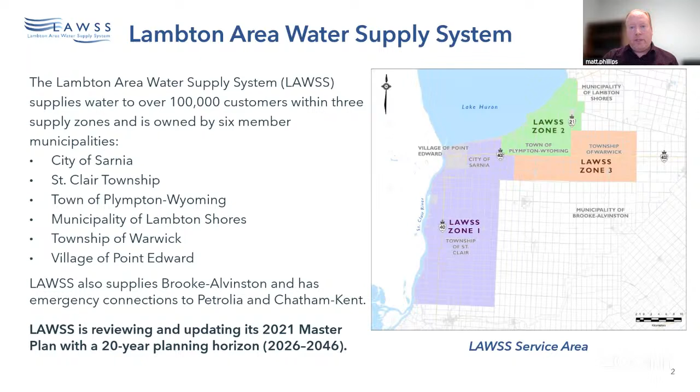LAWSS is reviewing and updating its 2021 master plan with an updated 20-year planning horizon, 2026 to 2046. Population growth has accelerated since the last master plan and is expected to continue, which means higher water demand. In addition to population growth within the existing service areas, there is the possibility of a new municipal customer connecting to the system. These trends drive the need for system upgrades and strategic planning.

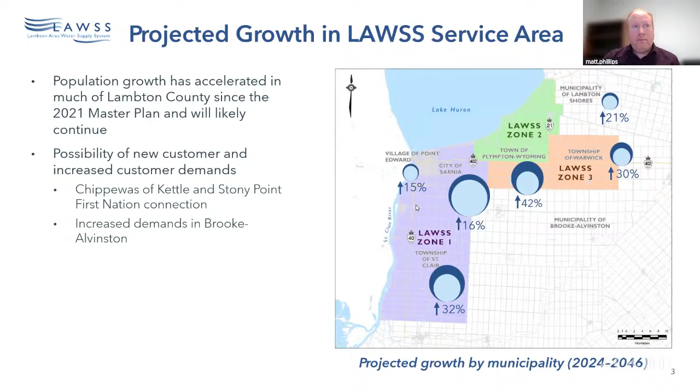The Municipal Class EA is a regulated process to guide the planning of public infrastructure. It provides opportunities for the public, government agencies, First Nation and Métis communities, and other interested persons to give feedback and guide decision-making. In simple terms, the Municipal Class EA process, approach number 1 for master plans, consists of 4 steps.

Step 1 involves defining the problem. This means understanding the existing challenges in the system and identifying future needs. Having a clear problem definition allows us to come up with appropriate solutions. A notice of study commencement is issued at this stage to announce the official start of the project and to invite comment and feedback. The notice of commencement for this project was first issued via email and made available on the LAWSS website on Wednesday, July 16th, 2025.

The second step involves considering opportunities and overall strategies to address identified system challenges and developing a list of evaluation criteria to assess the alternative solutions. The criteria should assess project impacts to the natural environment, social and cultural impacts, technical merits, and financial costs.

The first Public Information Center presented the findings of the first 2 steps to get feedback from you, the residents, business owners, and visitors of Lambton County, especially those who are users of or otherwise interested in the Lambton Area Water Supply System. The third step involves narrowing broad strategies down to more specific potential solutions and evaluating each alternative solution based on the identified criteria.

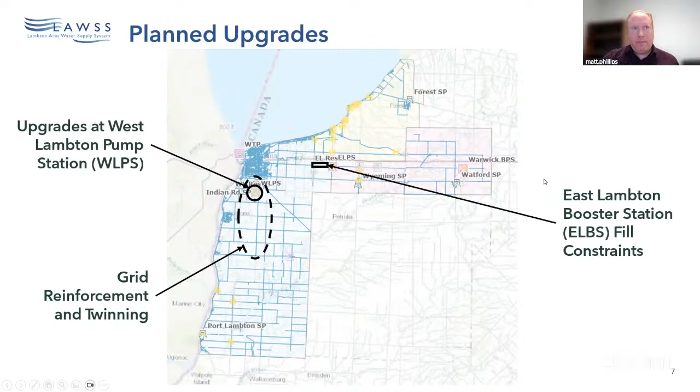For the Zone 1 planned upgrades, current cost estimates were obtained, or previous high-level cost estimates were updated to account for inflation. The interior pumping improvements at the West Lambton Pump Station are projected to cost between 7 and 10 million. These upgrades will be initiated after the ongoing reservoir rehabilitation project currently underway. The grid reinforcement and twinning projects are projected to cost roughly 114.6 million, and the East Lambton Booster Station Fill Constraints project is projected to cost roughly $5.1 million.

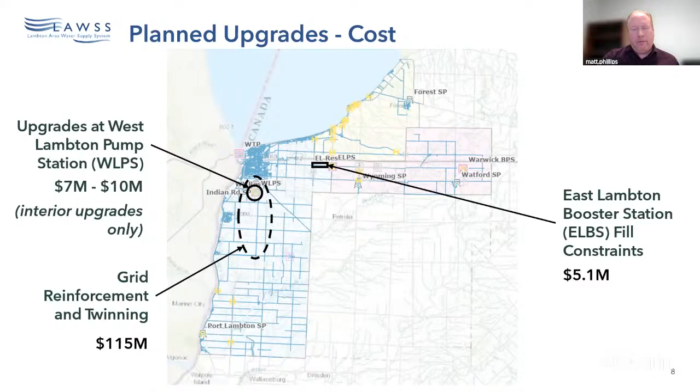The previous master plan proposed grid reinforcement and twinning projects, which involved the construction of new water mains to increase the supply to St. Clair and the West Lambton Reservoir, as well as improve system redundancy. While previously planned for implementation with a later time horizon, analysis of the current day situation shows that the grid reinforcement and twinning project upgrades are now needed in the short term to support system growth and potential emergency water usage by large industrial customers. It is recommended that LAWSS establish and refine water taking agreements with all new and current large industrial and commercial customers based on supply limitations while it works towards the implementation of these large-scale and expensive upgrades.

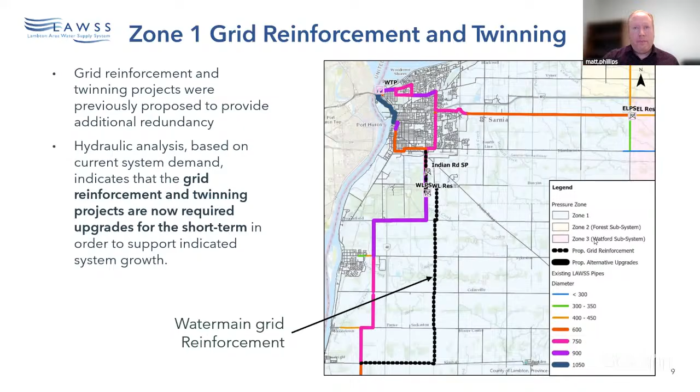Hydraulic analysis of future demands and conditions help to anticipate some of the servicing challenges the system may face. Modeling of the LAWSS system under 2046 conditions has identified the opportunity and need for pump optimization at the LAWSS water treatment plant, fill constraints at the West Lambton Pumping Station reservoir in Zone 1, specifically when large users are taking their maximum demands, low pressures in Forest if additional customers connect in Zone 2, and fill constraints and low pressures in Watford for Zone 3.

The alternative solutions evaluated in this EA study were developed with the objective of addressing these servicing challenges. Based on our hydraulic analysis, there were also recommendations for additional minor upgrades or investigation that are not directly evaluated in this environmental assessment. This includes pumping capacity increases at the East Lambton Booster Station to improve redundancy, as well as a capacity study at the LAWSS water treatment plant. It is projected that by 2046, total demands will be approaching 80% of the LAWSS water treatment plant capacity. Upgrades for the water treatment plant will need to be considered in the near future.

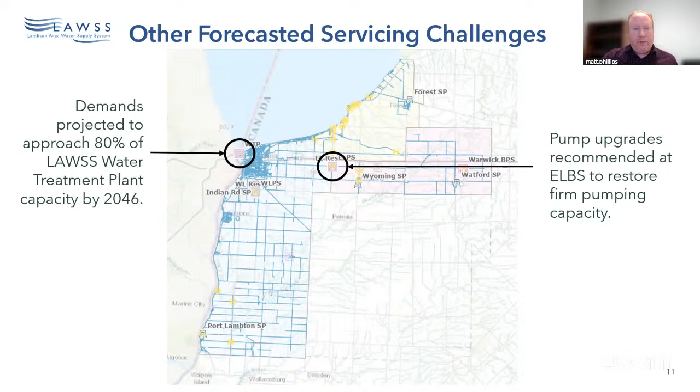The evaluation process for this master plan assesses alternative solutions using the following steps. First, the team used hydraulic modeling to simulate current and future scenarios with and without implementation of alternative solutions. This allows for an understanding of how the system will change under future conditions and after the implementation of alternative solutions. Next, the team conducted a comparative assessment of the alternative solutions using a list of evaluation criteria shaped by the public.

These criteria consider environmental, social, technical, and financial factors. Alternatives are given a grade depending on how effectively they satisfy these criteria. In step 3, the team then selected the highest scoring alternative solutions and uses them

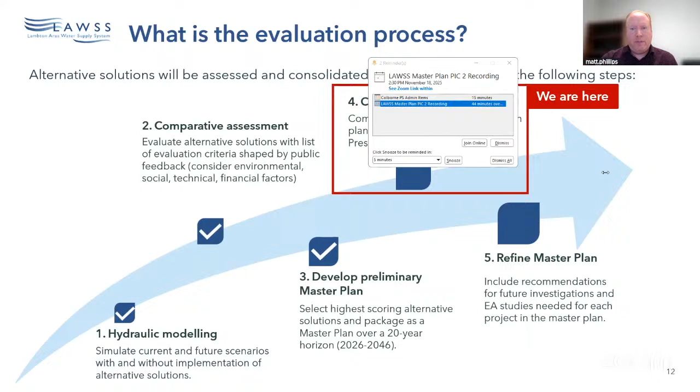to develop the preliminary master plan, which looks over a 20-year planning horizon to 2046. The selection of alternatives and details included in the plan are not finalized at this point.

The fourth step, which is where we are at the time of this presentation, involves confirming the preferred alternative solutions, completion of costing analysis, mitigation plans, and project sequencing. This fourth step also includes presenting the results in this Public Information Center, number 2.

Lastly, the final step in the evaluation process involves refining the master plan document. This includes incorporating feedback from the public and other interested parties received at PIC number 2, and providing recommendations for future investigations and EA studies needed for each project in the master plan. The master plan report will be made publicly available for a 30-day review period once complete.

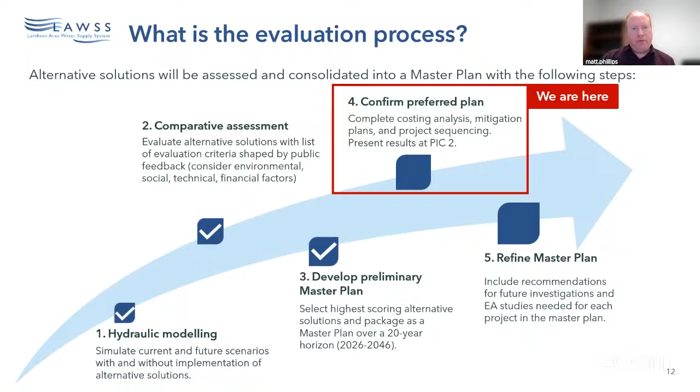Before the evaluation process could take place, the team developed a long list of proposed solution alternatives for each respective zone of the system. As a reminder, Zone 1 is the water treatment plant subsystem, Zone 2 is the forest subsystem, and Zone 3 is the Watford subsystem.

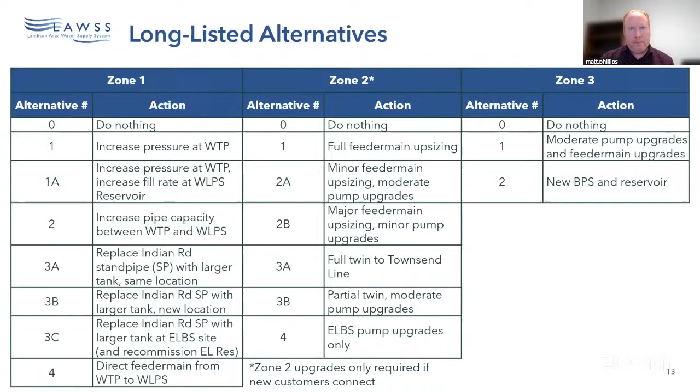These listed alternatives went through an initial screening process where those alternatives that didn't meet the 3 mandatory criteria were eliminated. These mandatory criteria were: number 1, that the maximum day water demands can be met over the 20-year planning horizon; 2, an appropriate range of service pressures can be provided across a service area in a maximum day scenario; and 3, proposed upgrades are compatible with existing facility capacities, processes, and key operations.

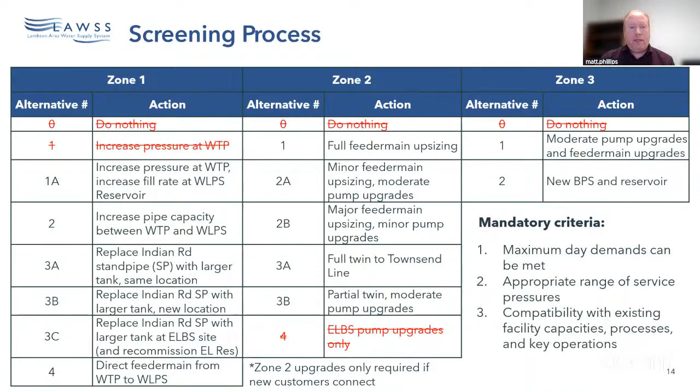Now we will look at the possible solution alternatives to address the forecasted servicing challenges that will face the system over the master planning horizon. The first is the need for optimization at the LAWSS water treatment plant, specifically at the high lift pumping station.

By 2046, the LAWSS water treatment plant will approach 80% of its capacity, and upgrades will be needed to meet increased demand. Firstly, pumps at the existing water treatment plant high lift pumping station are not currently optimally sized for the system operations. Pump optimization could improve the handling of demand variability, increase energy efficiency, reduce greenhouse gas emissions, and simplify operations. The suggested treatment plant design flow of at least 2,100 liters per second is being considered to meet future demands and match the water treatment plant's capacity.

For each of the following recommendations, pump upgrades could be phased in over time. Recommendations include installing a variable frequency drive on existing pump HLP2, installing a second backwash pump for redundancy, and systematic pump replacements to achieve design flows and pressures.

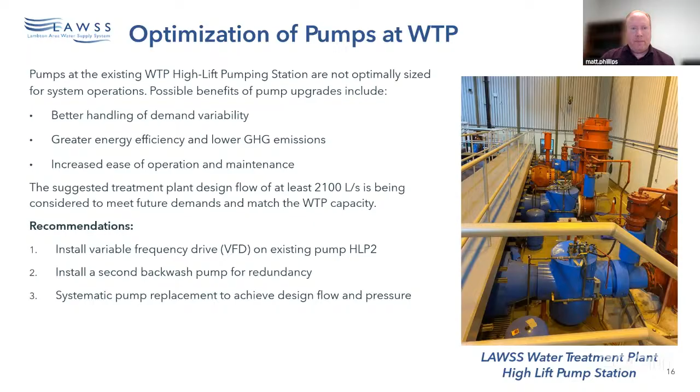Next, we will look at the solution alternatives proposed to address the primary projected service challenges for Zone 1. The first Zone 1 shortlisted alternative includes increasing pressure at the water treatment plant slightly, while lowering the pressure needed to allow an increased reservoir filling flow rate at the West Lambton pump station.

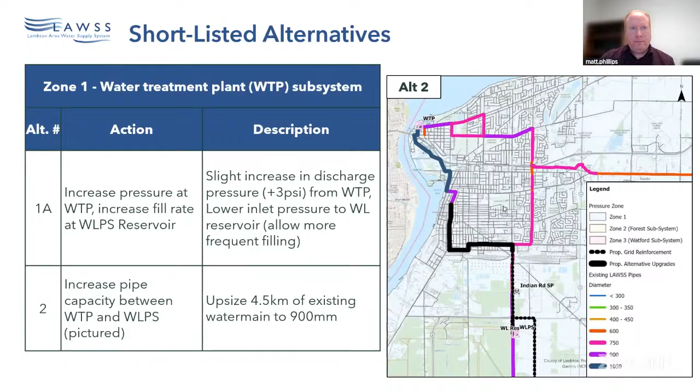Additional Zone 1 alternatives involve replacing the Indian Road elevated tank, which is located upstream of the West Lambton reservoir, with a larger tank. The new tank could be constructed at the same location, or at a new location, or at the East Lambton Booster Station site in Plympton-Wyoming. Increased elevated storage can help improve operational flexibility when filling the West Lambton reservoir.

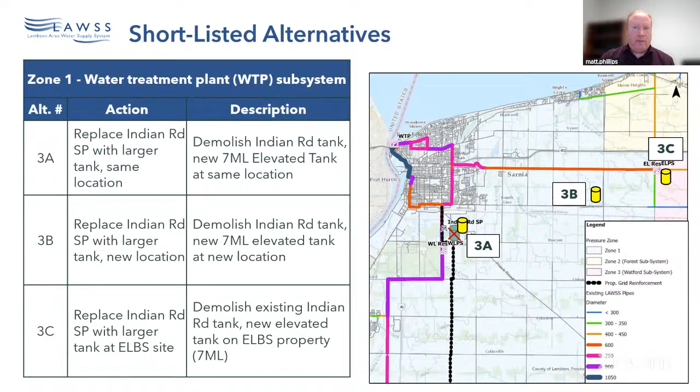The final alternative for Zone 1 is constructing a direct feeder main from the water treatment plant to the West Lambton pump station reservoir. This would involve approximately 12 kilometers of new 900 millimeter pipe, as shown on the figure.

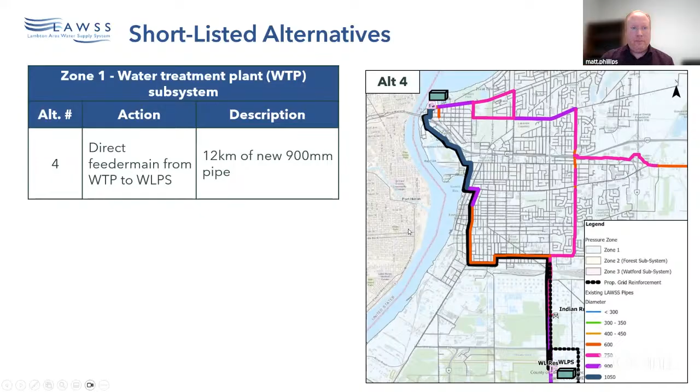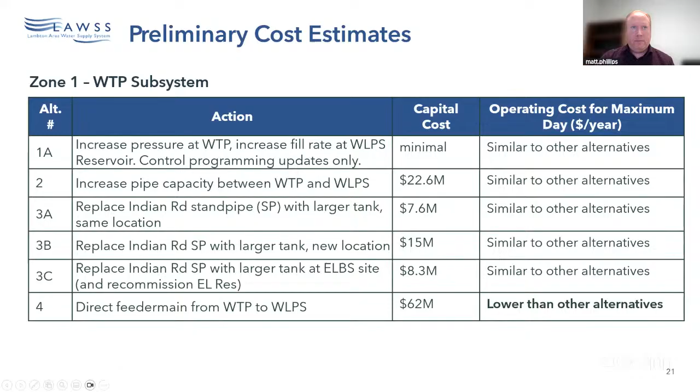During the evaluation process, the team compared project alternatives based on 5 categories of criteria: social, natural, financial, technical, and land-related factors. The preferred solution is one that reduces overall impacts and provides the required technical performance while minimizing life cycle costs. For each project alternative, its resilience to or potential to contribute to environmental risks or climate change will be considered.

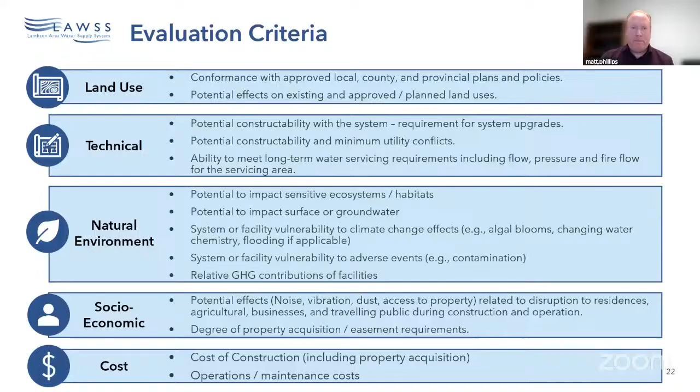The alternatives were given a score in each of the 5 categories, which were equally weighted. Scores are indicated with circles. The fuller the circles in each category are, the higher the alternative was scored. The alternatives with the highest overall score across all categories were then selected as the preliminary preferred solutions.

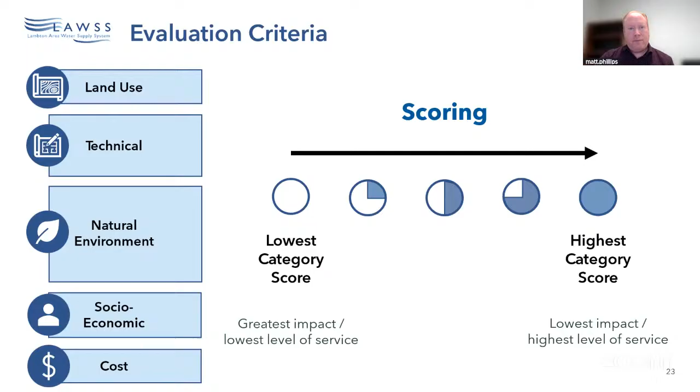The following table presents the comparative evaluation results for Zone 1, showing how alternatives scored against the criteria. Alternative 1A, which increases the pressure at the water treatment plant slightly and increases the fill rate at the West Lambton pump station reservoir, scored the highest out of all Zone 1 alternatives.

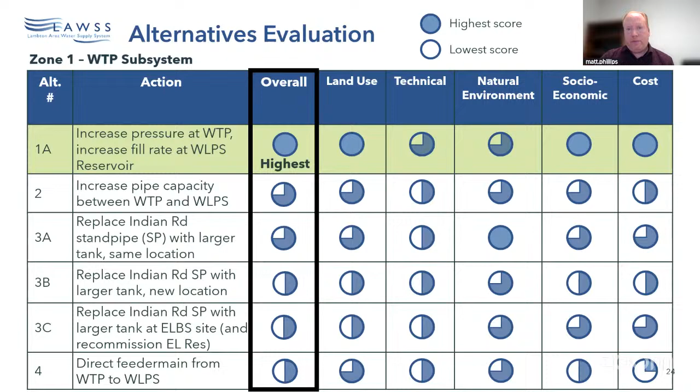Next, we will look at the solution alternatives proposed to address the primary projected service challenges for Zone 2. Notably, these upgrades would only be required by 2036 in the event that an additional municipal customer, Kettle and Stony Point First Nation, decide to connect to this subsystem.

The first alternative proposed for Zone 2 was extensive upsizing of the feeder main from the East Lambton booster station to the community of Forest. The construction of a water main along Lakeshore Road from Townsend Line to the north edge of the subsystem is also proposed in order to reduce head losses in the north end of the system. This new northern section of water main is included as part of all the alternatives for Zone 2, and so this portion was not directly considered in the evaluation.

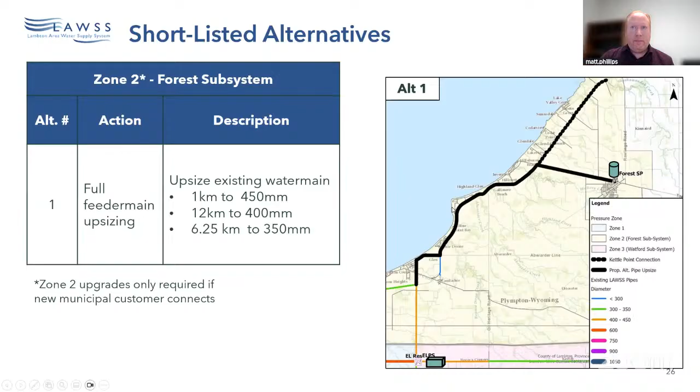Alternatives 2A and B involve balancing the strategies of upsizing the existing feeder main with implementing pump upgrades at the East Lambton booster station to meet required service pressures.

The last set of alternatives for Zone 2 includes the construction of a 300mm twinned water main. The first option proposes a full twin feeder main from the East Lambton booster station to the intersection of Lakeshore Road and Townsend Line, where it would tie into the new main proposed as part of all Zone 2 alternatives. Alternatively, a partial twin combined with major pump upgrades at the East Lambton booster station could also be implemented to maintain service levels.

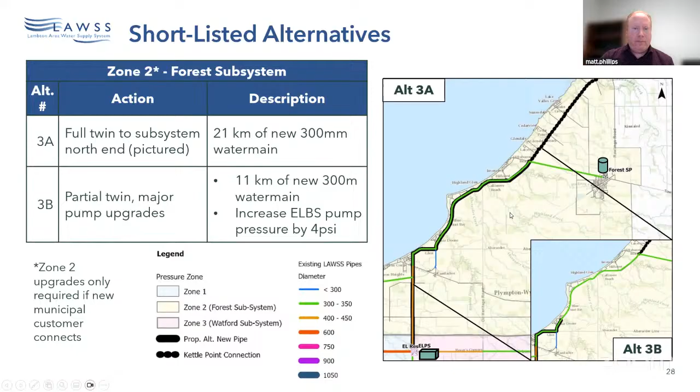The preliminary cost estimates for Zone 2 shortlisted alternatives are as shown. Capital and operational costs were both factored into the comparison of alternatives.

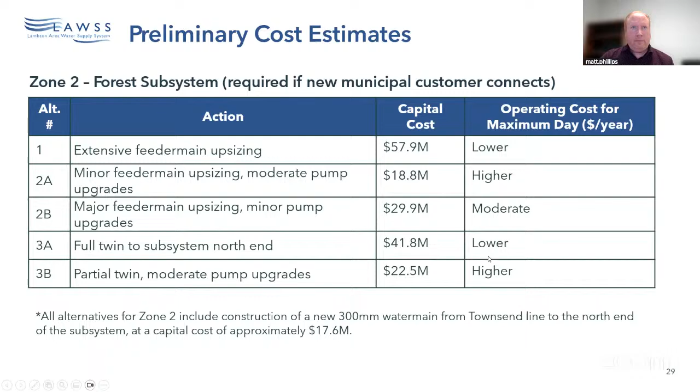The results of the comparative evaluation for Zone 2, which addresses servicing challenges if the new customer connection occurs, are shown here. Alternative 3A, which plans a full twin to the subsystem north end, scored the highest out of all the Zone 2 alternatives.

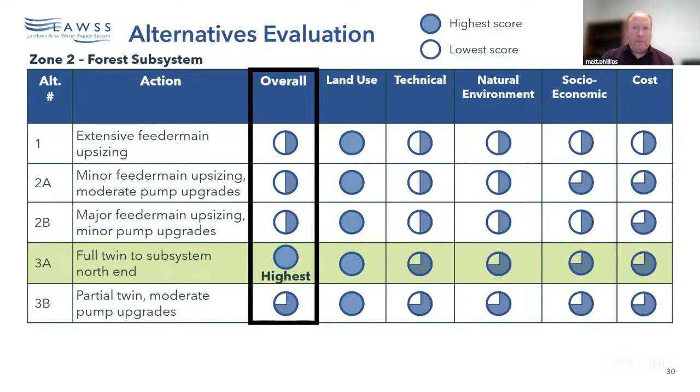Lastly, we will take a look at the solution alternatives proposed to address the primary projected service challenge for Zone 3. Notably, the entire demand growth associated with proposed development in Alvinston was accounted for in this analysis.

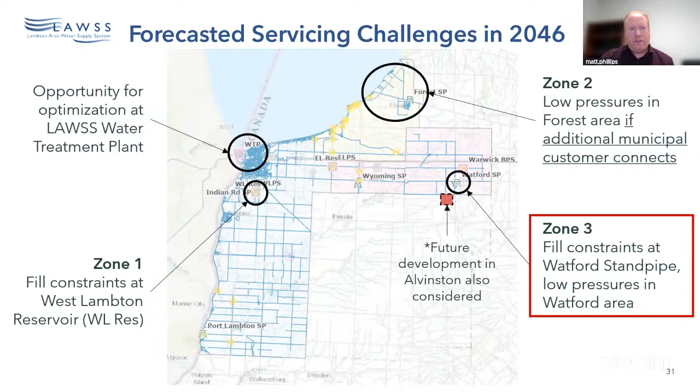Zone 3 alternatives include: 1, upsizing of much of the existing feeder main from East Lambton booster station to Warwick; or 2, constructing a new booster pump station and reservoir to facilitate transmission to the east side of the system. This option would also involve some feeder main upgrades.